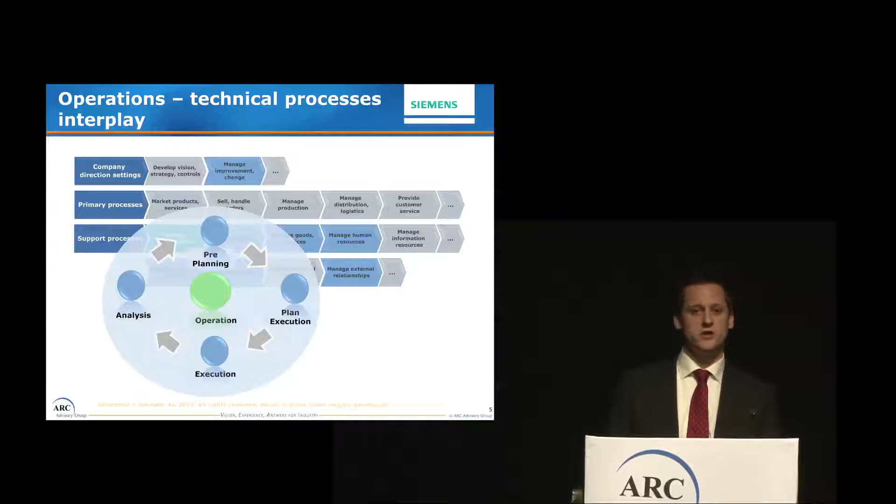So it's from the analysis of the actual data, which is currently generated in the plant as well, compared to the data from engineering, to the pre-planning of the maintenance and operational tasks, to the plan execution with the respective work permits we heard yesterday, or certain documentation required, to the execution, which is sometimes also a pure engineering task, and later on to the analysis again.

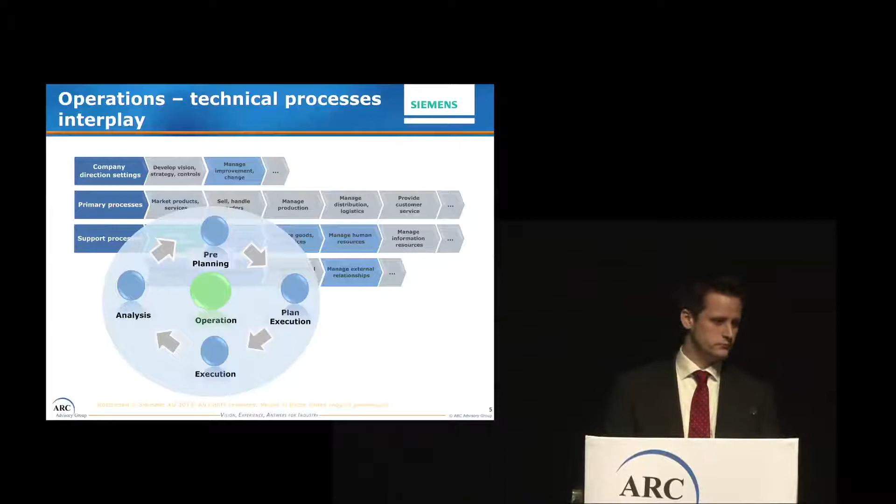Now, having one idea to overcome these challenges and to reduce the overall run times as well as to increase the flexibility of a system, I think this is a pretty easy approach: having one central data model. This data model is built up during the engineering phase and is utilized during the operational phase again. With this kind of approach, we will minimize and eliminate the overall challenge we faced in the beginning: the manual handover of data from engineering to the operational phase.

What does this mean? If you have one data model, however it will look like, you can derive all kinds of information from engineering to operation, to as-is data, to data which are tracked within the system itself by DCS, for instance, which are the trigger later on for further operational tasks, maintenance, and engineering for revamp, overhaul, or repair. So we also talk about a cycle.

So this data model is the basis for the operational center, which then will have a certain impact on the plant itself. Key point here is information, of course. Information is only valuable if you can bring it to knowledge, because knowledge is something which gives us the opportunity to achieve operational excellence, because we can learn from the past to make it better in the future. Then, of course, decision making based on historian data is one of the key points, as well as taking respective actions based on a certain event.

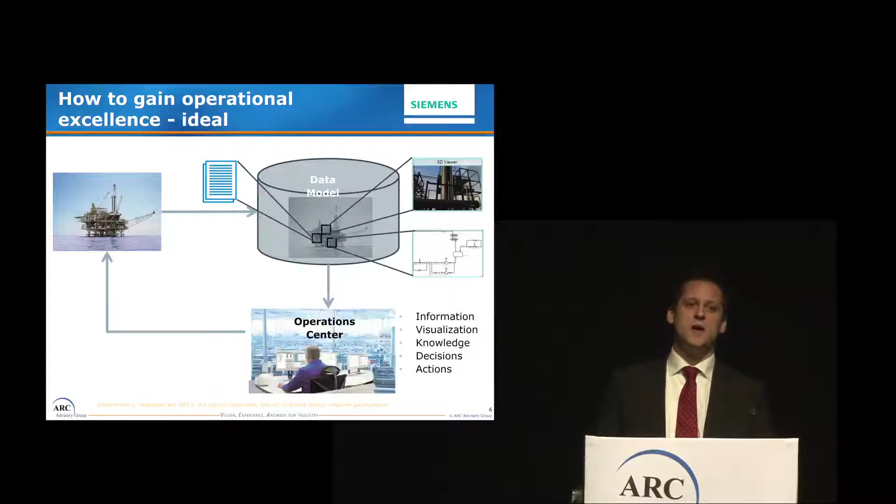Having a more inside look, how will it look like from an IT perspective, let's say. Right now we are working in islands, so the overall environment is broken down into islands. There is a certain engineering solution for electrical, for process, for mechanical, even for, let's say, generating data sheets or any lists. And this is one gap where we again lose data every time we would like to hand over and we would like to enhance our performance with respect to operational excellence later on.

Now the idea is to have one centralized model, as mentioned in the first slide, which combines engineering, operations, and ERP. Of course, there will be no one solution directly available which covers everything, because if we especially look at ERP and operational engineering, it's two worlds which have overlapping parts during the operational phase and even the engineering phase.

Now what has to be done is the consolidation of these applications to enable a nice, smooth, seamless information flow between all of these softwares, for instance. This can only be managed if there's one particular data format available in one consistent system where they communicate to each other.

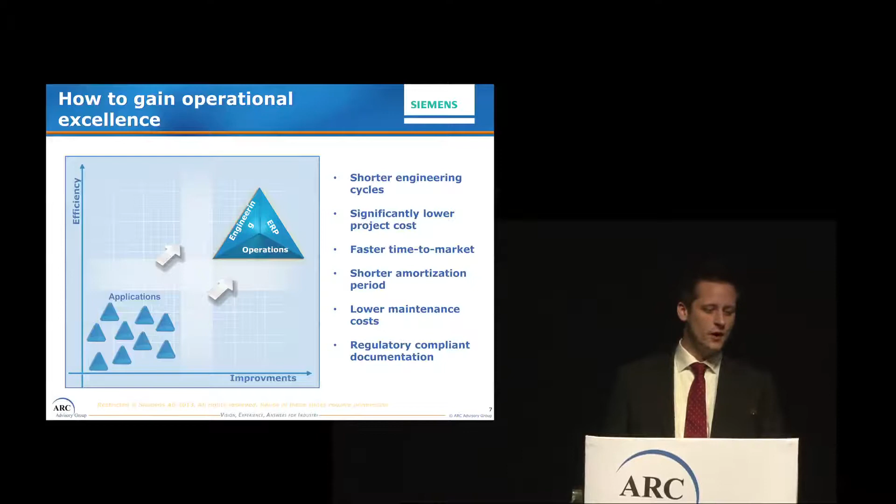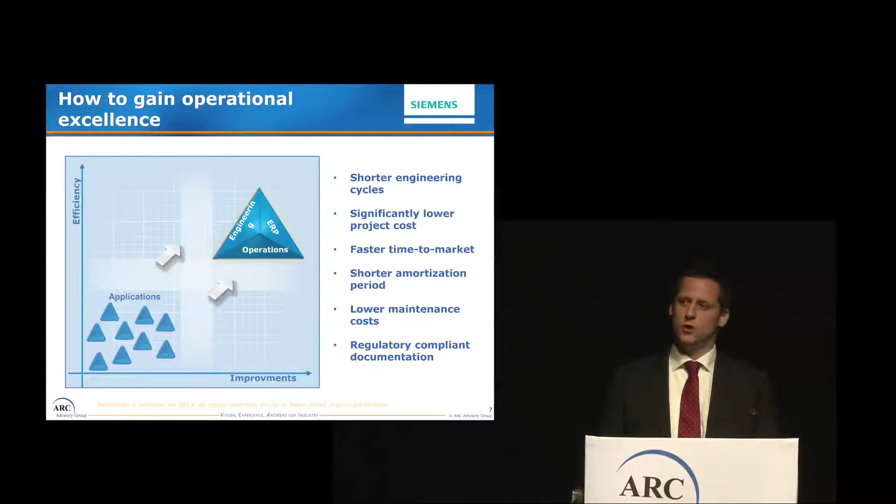And here it comes now into picture: lower maintenance costs. But why? As I mentioned before, maintenance comes out of knowledge which you gained over time, as well as the resulting engineering tasks out of certain events. If a pump needs to be replaced, we should know, did this pump fail earlier and why? And this results then maybe in a different engineering manner. If we have to replace a pump and we know it fails after so-and-so hours because this vendor does not fit my certain industry, for instance, because of too much vibration, whatever, then we have to know this. And if we know this, it has an impact on the engineering later on as well, so that the cycle is closed again and we use all information available throughout the overall operational cycle.

Now, how does this look from our perspective, just generally as an idea? We have heard yesterday about object orientation, which is a great approach, because object means you have one central location where you feed all information in from, let's say, from engineering at the feed stage when the idea is born, to the detail engineering phase, to the commissioning, to the operational maintenance, down to shutdown.

Everything is in this object. It's like a cubicle. This cubicle has n sides—n sides because every discipline has its own side, his own view on the things as they are.

The beauty about this is it doesn't matter from which side you look, you have all data available even from the other side because it's stored inside.

The value and idea behind this is giving tag IDs, what you see in the left corner. Tag IDs are generated one time and then spread to all disciplines automatically, because it is one cubicle viewed from various sides. So it doesn't matter if it is about 3D, electrical, or maintenance later on.

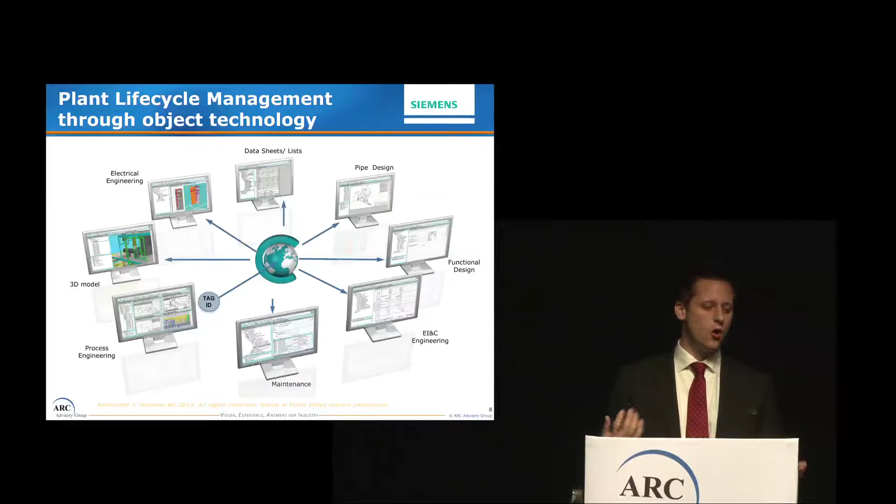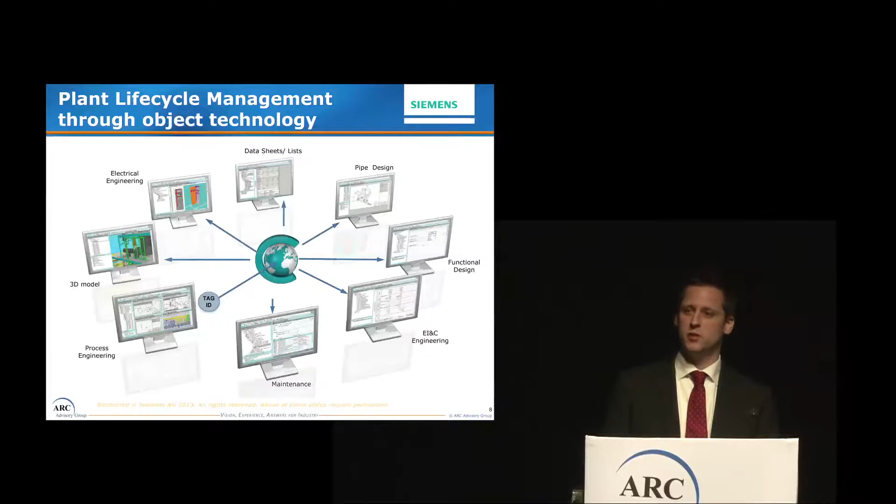This is a chance to derive information and utilize it from engineering for operational parts, to utilize everything that has been generated before. Now, how does it look like in the overall cycle?

As I mentioned earlier, every piece of information which can be transformed into knowledge leads to easier decision making throughout the entire plant life cycle. For example, if there's an alarm which comes from the DCS system and triggers a certain event to be carried out with respect to maintenance.

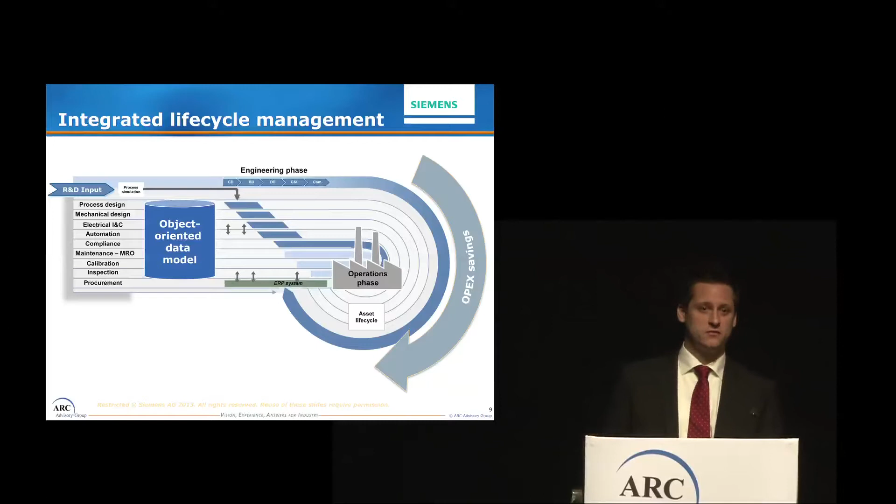This was a drastic example, but in general, time to take the right decisions can only be saved when we have it all consistent in a certain manner.

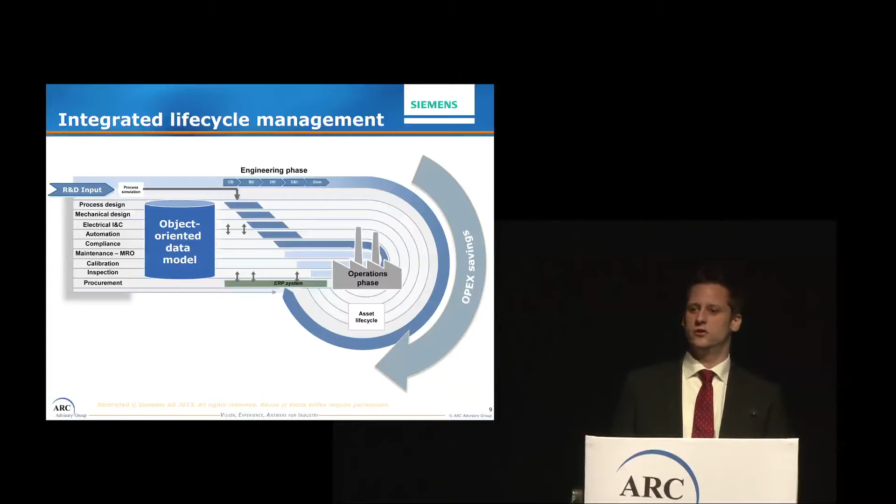Now, I would not like to spread it too much. So our conclusion is what we already heard yesterday: the digital enterprise process. In the background, you can see a little bit the overall picture of where it should lead to. It's a cycle, one system, everything involved, but of course with certain connections to other systems due to the fact that in some cases we have only overlapping, etc.

But in general, heading for digital enterprise processes is, from our perspective, the future not only for engineering, but also to get this information to guarantee operational excellence in the process industry.

So what does it mean? It means having a global data center for efficient, risk-based industrial maintenance strategies. I just mentioned with respect to historian data, which will turn into certain decision-making points for future tasks.

Consistent documentation because of missing handovers of data from engineering to operations and from operations back to engineering, as well as overall KPIs and analysis enabling improvements and change management. Every plant is moving all the time, and these changes need to be tracked, because otherwise it will not be possible to take the right actions and decisions in one of the next occurring cases.

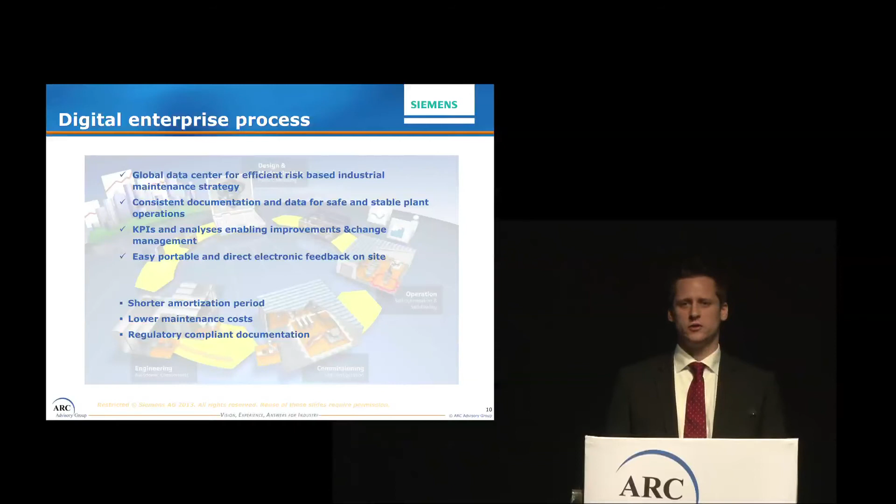What do we gain out of this general approach? It's quite easy. We gain a shorter amortization period and lower maintenance costs. A plant is productive when we can lower the overall cost and when we can increase the efficiency.

Efficiency can be increased only if we know our plant down to the smallest nut and bolt. If we know it to this extent, we can predict certain tasks, we can interact before an accident happens or before an event happens, and this gives us more strength on efficiency in our plant and guarantees operational excellence for the future.

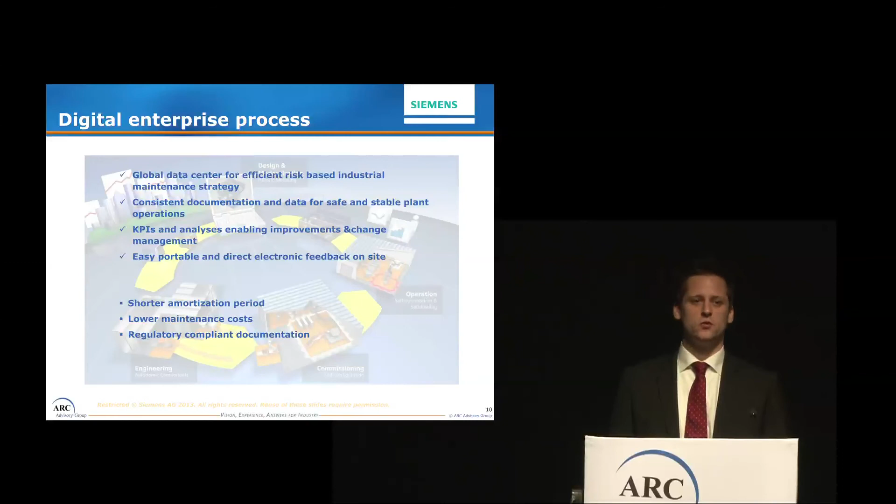And of course, based on this, we get the respective documentation, everything completely in one system, to fulfill certain requirements such as FDA and HSE documentation and requirements, and also to fulfill all regulations, whether governmental or from any other organization.